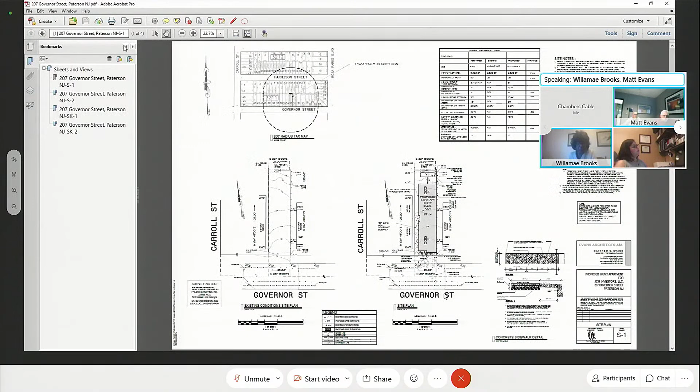Yeah, okay, so I could share my screen here. Give me a second. So we have... can you see that? The site plan is visible? Yes? Okay. All right, good.

So basically what we have is a 4-sheet submission, S1, S2, SK1, SK2, dated 2/22/21. What we're proposing, it's a vacant lot, and we're proposing new construction, which would be a 6-unit building, 1-bedroom each. That would be basically to the easterly side of the lot and have access along the westerly side.

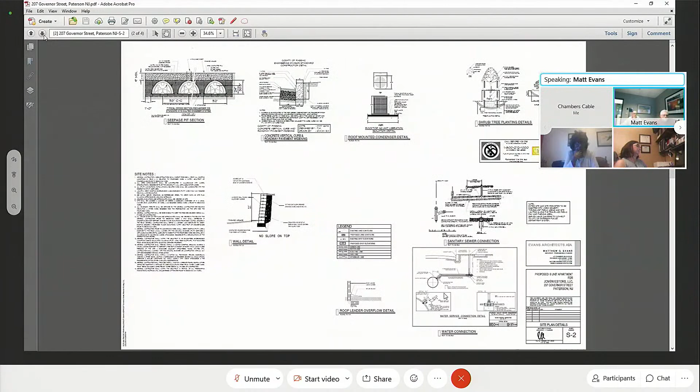It's 12 by 17. Then we have, for exterior access for the tenants, a refuse and recycling area, which is basically outside but has interior access, built onto the interior of the building. We have a sprinkler utility room, a package area in the lobby, and then in the rear we have unit 101, that's 603 square feet, also another large unit with a large bedroom in the back.

600 being the minimum size? Yes. Okay. And then we go to the second floor—we have a main entry and stair which accesses all 3 floors. There's no basement, so everything's above grade. And the rear unit is similar, a little bigger than the first floor unit because we don't have the sprinkler utility refuse area.

So we go back to about 761 square feet. The front unit is 737 square feet, similar to the upper floor. So the second and third floors would be the same, and they're all pretty much similar in the same context of what we have.

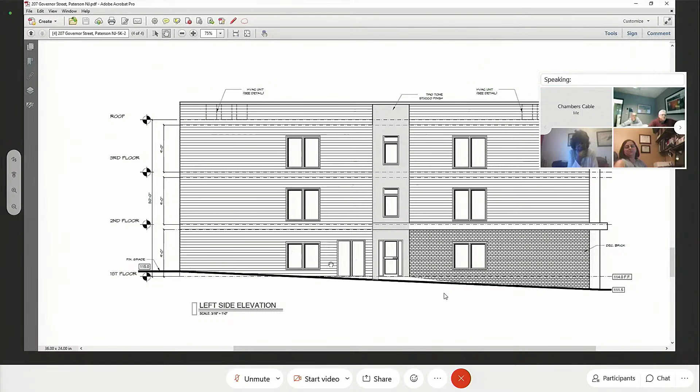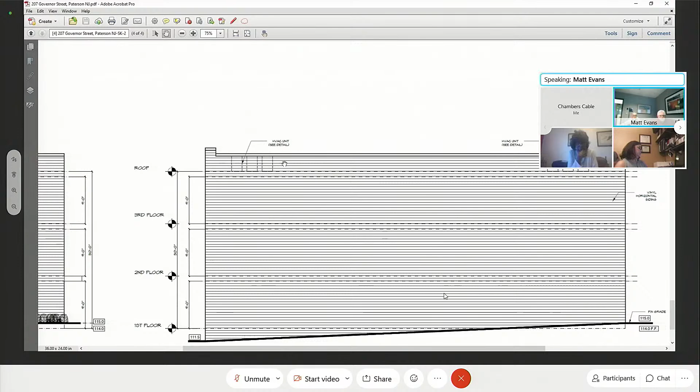Large windows are predominantly on the second and third floor because of the street level apartment—we wanted to give a little more privacy. So the rear elevation shows the vinyl siding, and the right side would also be vinyl siding. Then we show the HVAC units, which should be tucked behind the parapet on the exterior.

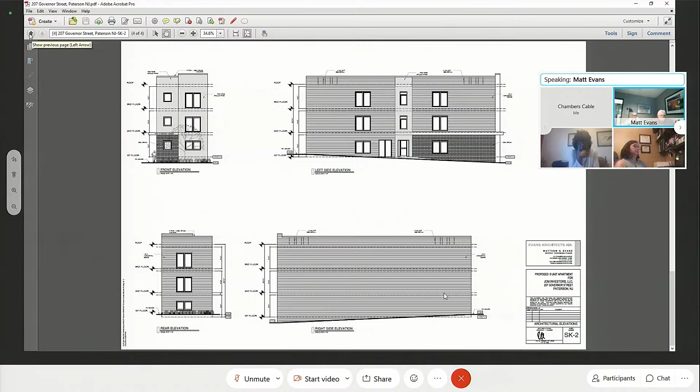So that would be the architecturals, what we're proposing—similar to one we proposed that was approved by the board a week or two ago. And all these units are self-contained with laundry facilities? Yes. Okay, and we do have a substantial amount of open space because of the size of the lot? Yeah, so if we look at the site plan, we can look at the back.

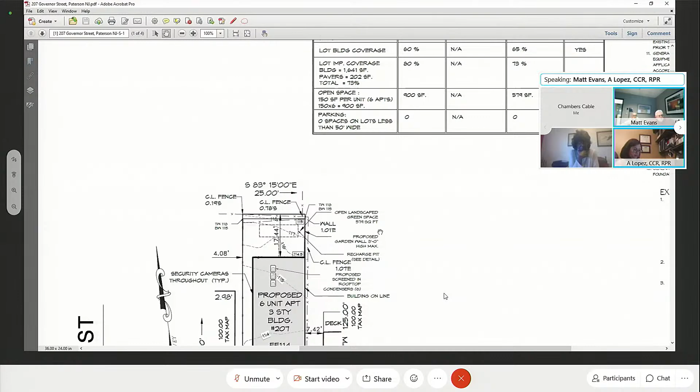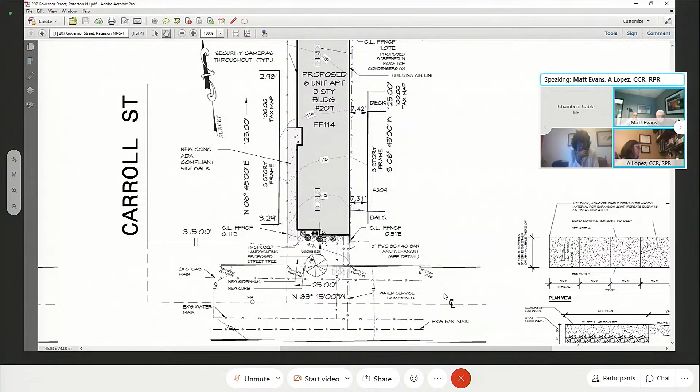We have 17 feet by 25 feet in the back, so we have roughly 600 square feet of recreational, outdoor, passive and active space. And then we have the ADA compliant walkway. We're also proposing landscaping in the front, a 3-foot setback on the building. We've used that to buffer the sidewalk with landscaping and a proposed street tree, which would be a decorative cherry tree that would blossom in the spring and wouldn't get too big, so it'd be more decorative.

Okay, and our building stories is only 3 stories, is that right? Yeah, within the requirements. And also our building height is well within the requirements? Yeah. Okay.

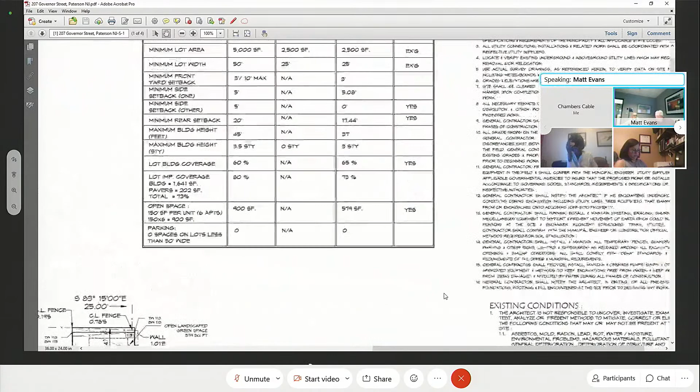I think I'll conclude Mr. Evans' testimony, subject to any questions the board may have.

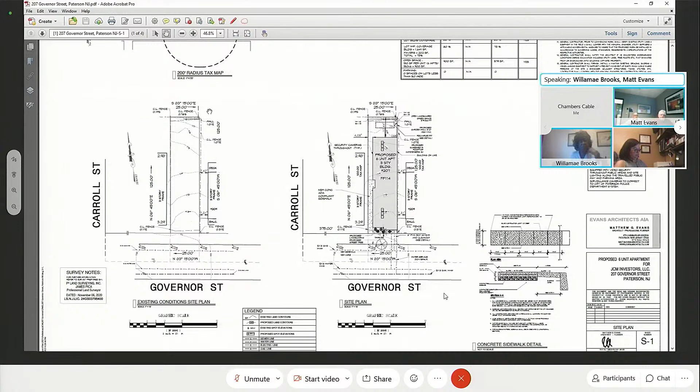So Mr. Williams will be testifying for planning. Okay, so you have Mr. Reed and Mr. Williams, correct? Well, do you want to take Mr. Reed before I go to the public? No, we can go to the person, or you open it to the public. Okay, Mr. Reed is up.

Do you swear or affirm the testimony you're about to give us is the truth, the whole truth, and nothing but the truth? Yes, I do. State your full name for the record. Andy Reid, R-E-I-D, Director of Development for JCM Investors.

Thank you, Mr. Reed. You heard Mr. Evans' testimony this evening? Yes. And you are in full agreement with that testimony? Yes. And you also had the benefit of hearing Mr. Deutsch's report and his staff report? Yes. Again, this is a design that is similar to others that we have proposed to the board successfully.

Could you tell us your thoughts about the 1-bedroom units and how this will function? Yeah, well, we have a demand for 1-bedrooms. Obviously there's no parking there, and Mr. Williams will talk about that. But in our experience, a lot of times our 1-bedrooms, most of the tenants are just starting out or they're elderly, so they use either public transportation or car share services and stuff like that.

Okay, well, I know we've been through this on other applications, but describe your security and lighting standards that you apply to these buildings quickly again. The security, the cameras, the maintenance - all of our properties, and we have substantial properties in that area, so they feed off each other. We have a lot of security in that area. We keep almost that whole entire block all cleaned up, and actually the block prior to that and that block. We keep the street all clean on a daily basis.

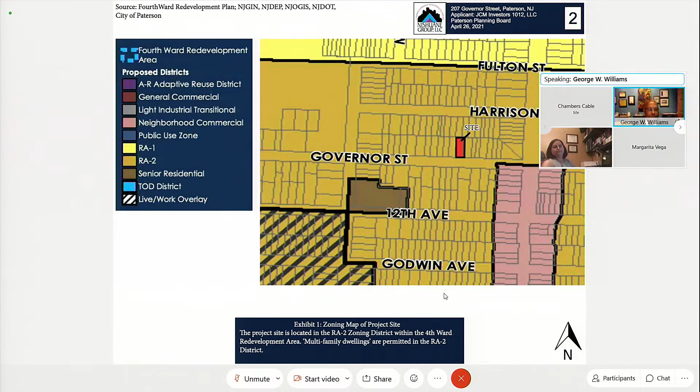The first slide, we always include this just to, for the record, acknowledge that we are certainly in the RA2 district. In this case, our site is indicated with the red shading and black bold boundary. This is slide number 2, showing we are in the RA2 zoning district of the 4th Ward. Slide number 3, another perspective, also an aerial photograph looking at the site, again shaded in red with a bold black border. This is to give you a sense of its context.

Located on Governor Street at 207, as was mentioned earlier, and not far from Rosa Parks Boulevard. What's also instructive from the aerial view is you get a sense, and this goes to Commissioner Ahmed's discussion about lot sizes, of what the land development pattern is in this section of the 4th Ward redevelopment area. You can see that by looking at the rooftops, which are darker shades, in some cases lighter shades, in each of the lot rectangles you see on this site.

I would submit to the board, without doing any calculations, there are a number of undersized lots in this section of the 4th Ward redevelopment area. In fact, your redevelopment plan mentions that there are opportunities to develop these undersized lots so that they do not remain vacant or abandoned.

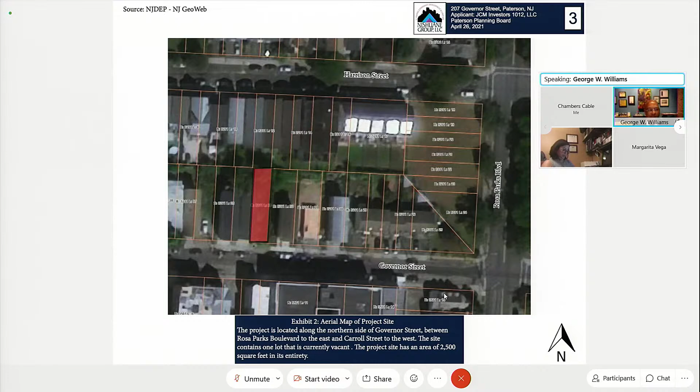I'm going to note that our slide also refers to a 2,500 square foot lot area. I will concede to Mr. Deutsch's calculation on the fly based on the survey, and we can certainly amend our exhibit and submit a clean copy. Slide number 4 is a frontal view of the property.

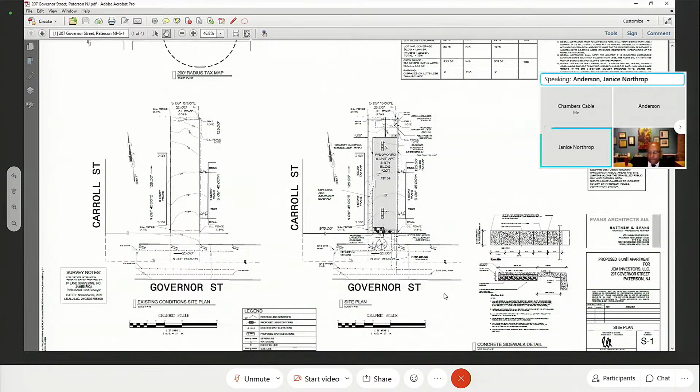Okay, please show commission. Excuse me, I'd like to say something please. If you're going to speak, let the other one finish, so Melinda, the court reporter, can document everything that is said. Thank you. Fine. Okay, I would like Mr. Evans to show the first floor to Commissioner Ahmed, where this change is going to take place. Mr. Evans, if you would delineate on your first floor plan how the unit will be completely eliminated and provide the amenity community room.

Okay, as you see on the first floor plan, we have the refuse recycle and the sprinkler utility, and there's a door going back to that. Basically, we would use that whole space as amenity space and remove the apartment, and then the rest of the apartments would remain as is, based on that core development, central corridor and stair, which would remain. So everything in the rear would be part of the amenity space.

And that would essentially, Mr. Williams can confirm it, and I think you already did, take us over the top in terms of the open space requirement. Yeah, that would definitely do that, and we would have additional storage, amenity space, and could even put a fitness center in there also. So we have a lot of space to work with. Thank you. Commissioner Ahmed?

I think what they're saying is that even if they remove the one apartment, it's still too small to put any parking, because these are only 1-bedroom units. I might be wrong in that, but I think that's it.

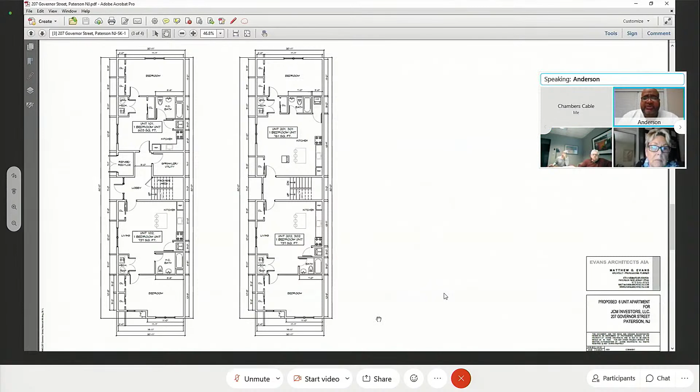This right here would benefit all 5 of the tenants, and like Mr. Evans said, if they want, we'll put a fitness center, a little gym in there, so they can all benefit from it. Okay, all right, thank you.

Commissioner Ahmed, any other questions? No, ma'am. Okay, all right, any other commissioners have any questions? Okay, hearing none.

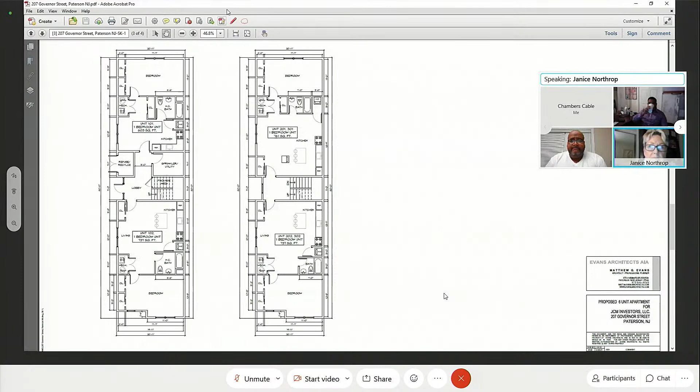Thank you again, Madam Chair. I want to make this very brief. I think we've really worked very hard on this application from both sides of the aisle, in terms of the applicant's presentation and the commissioners. I want to thank everyone for the work they put into this application. I think we've arrived at a very positive result in terms of the very limited bulk variances required. I think this is a very positive application for a specific demographic need in this area, and I urge the board to consider a motion for approval. Thank you.

I'm going to open it up now, commissioners. Would any commissioner like to make a motion on this application? Anyone? Yes, Commissioner Dean? Go ahead, please.

On the application of JCM Investors 1012 LLC, 449 East 18th Street, Paterson, New Jersey, 07524. Commissioner, can I interrupt you one second, please? My apologies, I just wanted to clarify something very quickly before you make your motion. Whoever can answer this question.

By removing that rear unit, what is the actual square footage of the proposed recreation room or open space, whatever it is that you want to call it? Mr. Evans testified approximately 600 square feet, is that correct? Yeah, I didn't hear that. Was it 600? Yes. Okay, thank you. Go ahead, Commissioner. I apologize. Sure, no problem.

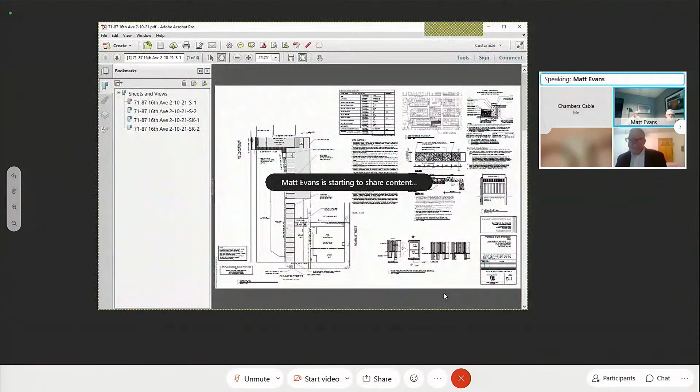Okay, I'm going to post our plan. Can you see that?

To illustrate what we have, it's an irregularly shaped lot which connects 16th Avenue to Summer Street, and it's existing 100% impervious area. What we're doing is we're proposing a new 4-story building to the westerly side of the property. It's basically tucked between a previous approval we had for 12 units on Pearl and Summer, and the car wash adjacent to our property, which is along 16th Avenue and ends up on Summer Street.

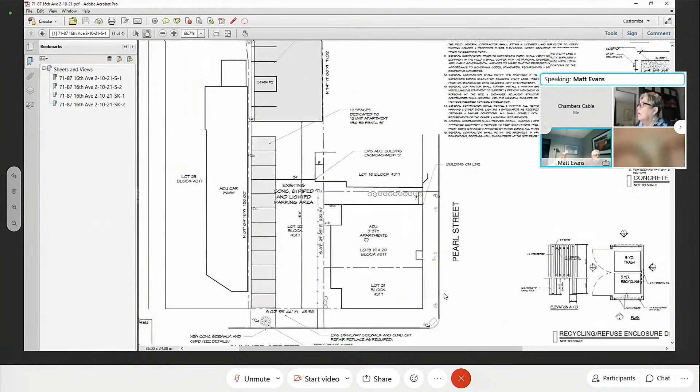It's 100% impervious coverage, and we show the parking spaces from the previous approval. There's 12 parking spaces dedicated to the previous approval for Pearl and Summer for the 12 units that was conditioned. The rest of the parking, 12 spaces, we're dedicating to our proposed building, all underneath the garage area. So we have 12, and then we have the 12 consistent with the previous approval.

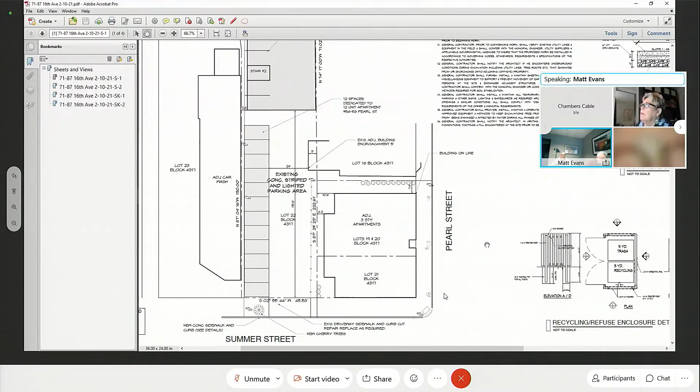The building is 4 stories, and it faces 16th Avenue in front, sandwiched between the residential to the west and the existing car wash to the east. I'll illustrate a little more and go to the floor plans.

On the first floor plan, the ground floor, we show the 16th Avenue entry. We have landscaping to the front, and a paver patio and path to the rear of the building. Inside we have a nice open lounge area and entry lobby, which is 709 square feet. We have mailboxes shown, a package room, and also the first egress stair, which is part of the lobby area, bringing us up to the upper floors.

We have the elevator, sprinkler room, and bike storage. Adjacent to that, we show the refuse and recycling, which is exterior, accessed on the exterior walkway and path, another way to access the property for refuse and recycling.

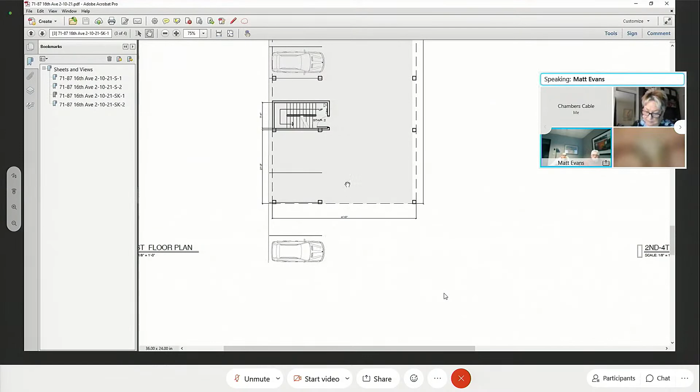We show the line in the building above, 11 parking spaces in the garage. We show the handicap space and the parking spaces, the garage, and then there are 2 spaces exterior, which are counted towards our application. That's all underneath the residential.

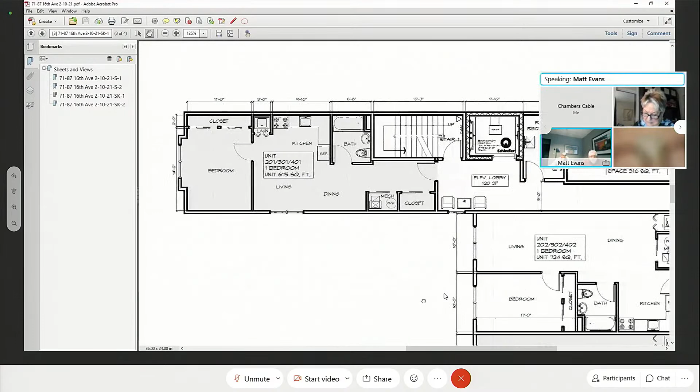Going to the second floor, the second through fourth floor would be the same type of layout. Unit 201, consistent with 301 and 401, is a 1-bedroom unit, 675 square feet. We have a large bedroom in the front, living, dining, kitchen, a stackable laundry as part of the unit, handicap bathroom, full bath, and mechanical, which are all separate utilities for all the units, plus a front hall closet.

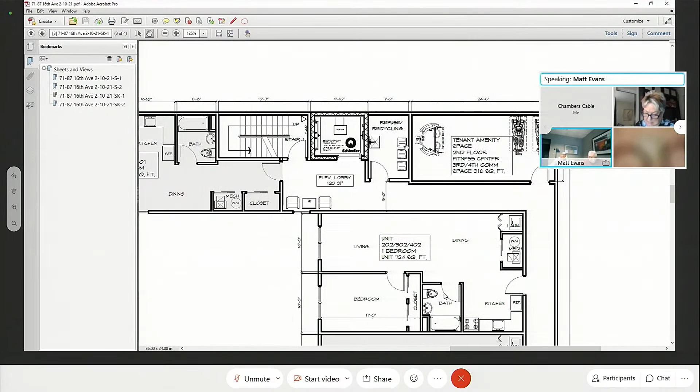That was accessed off the entry. The elevator lobby has 120 square feet with seating and a window, and access to refuse and recycling on each floor, part of the service area. The tenant amenity space on the second floor is a fitness center, and the third and fourth floors would be community space, 316 square feet per floor.

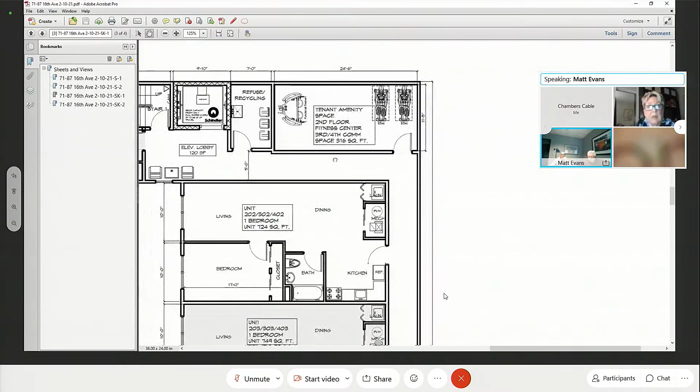Unit 202 is a 1-bedroom apartment, 724 square feet, which meets the minimum requirement—124 square feet over the minimum. We have a large living dining area, kitchen, open living space, a large bedroom, and a handicap bathroom. As mentioned, all units have separate laundry facilities.

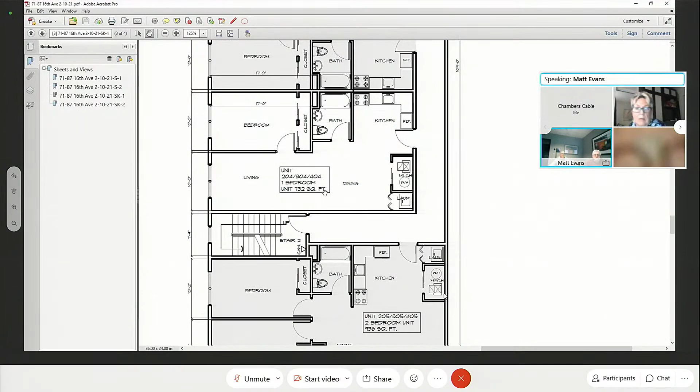Unit 203 is similar to 202, also a 1-bedroom unit. Unit 204 is a mirror of 203, so that would be the same. 202 is 724 square feet, 203 is 749 square feet, and 204 is 732 square feet. Then we come back down the hallway, and there's the fire stair, the second means of egress off to the rear.

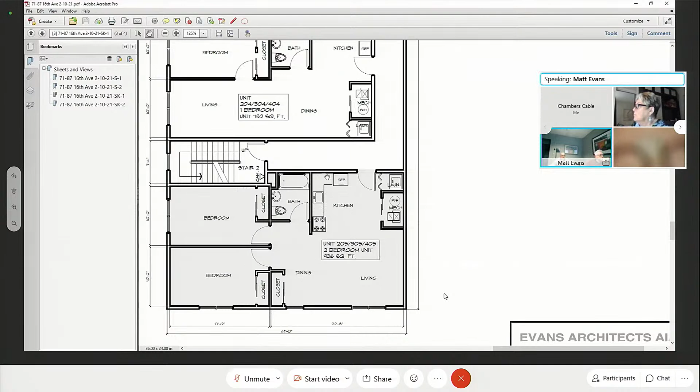Then we have unit 205, which has a nice 2-bedroom unit at 936 square feet. We have a big open kitchen, dining, living area with large windows along the living space, and windows along the bedrooms for the bedroom space. That would be consistent with the floor plan.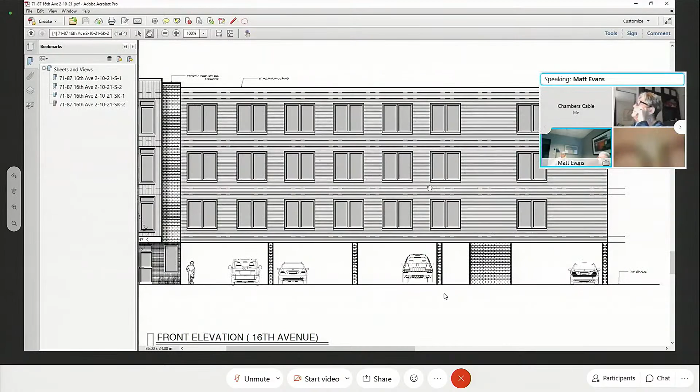We have street trees, which are consistent with the redevelopment plan. And then we have a mix of materials. We have large windows for all the units.

We have brick veneer, vertical siding, and a mix of materials, also horizontal siding on the rear section. Looking at it, you can see the cars under the garage area, and this rear section is not at 16th Avenue. It's pushed back and behind the setback from 16th Ave for the garage in the rear.

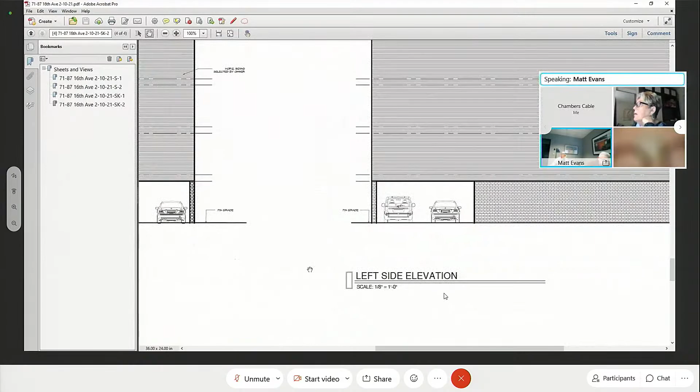So the left side is a plain elevation that's on the rear property line. And then we have the same with the rear elevation along the back. This is the left side elevation, along the side, which is adjacent to the other residential units.

And then you can see where the car wash would be if you're looking at it from Summer Street, but looking at the building cut away, we have the mix of materials and large windows for the apartments from the second, third, and fourth floor.

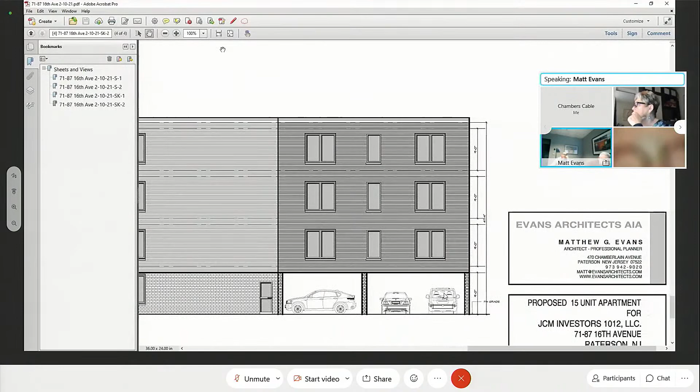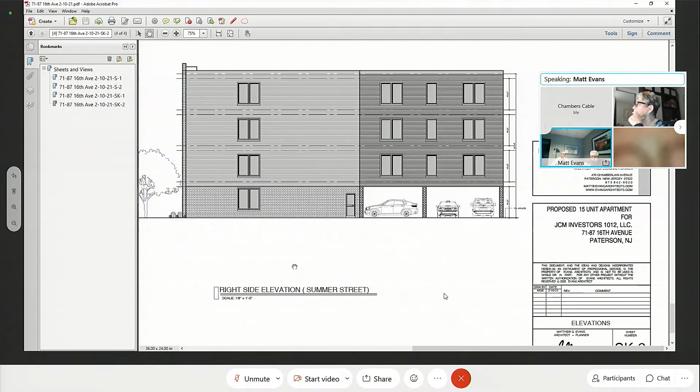Zooming in here, we have nice high ceilings in all the apartments. We're proposing 9-foot ceilings for the garage and 9-foot ceilings for the second, third, and fourth floor. That gives a lot of volume to those units and a much more pleasant atmosphere within the living space.

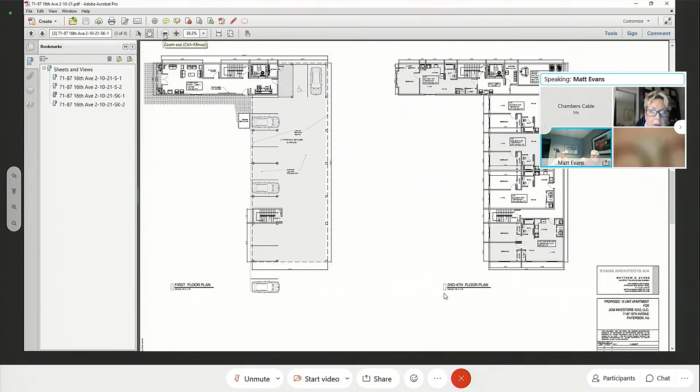That would be the architectural plans spelled out in what we submitted. Just to clarify again, Mr. Evans and Mr. Williams can amplify upon this, please designate the parking that's on site and the parking referencing the Pearl Street project, and how it's utilized.

Looking at the first floor plan, on the top right we have a handicap spot and a regular spot, and the handicap access. We have 2 parking spaces there.

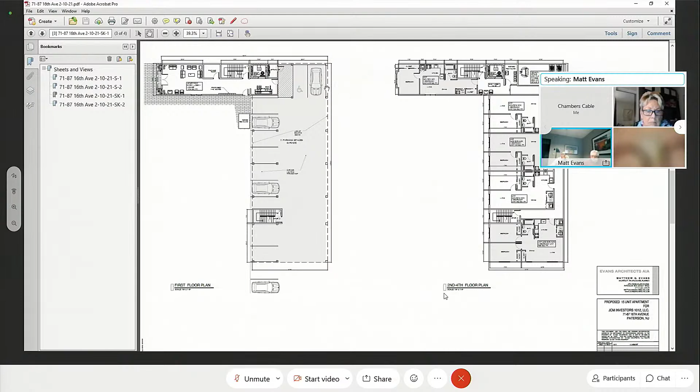Then as you come down under the garage area, we have 1, 2, 3, 4, 5, 6, 7, 8, 9 underneath the garage. So that's 9 and 2 is 11, and then we have 2 exterior spaces adjacent to that, which I'll go back to the site plan to show.

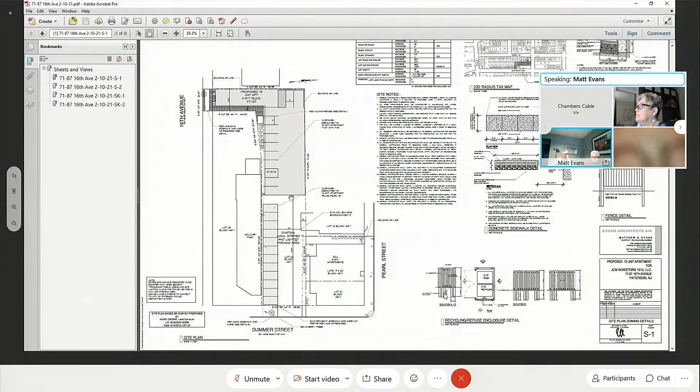You'll see how we have these spaces outside and under the garage dedicated for our development. Then we show the shaded area, which was part of the resolution for the Pearl 12 units. Those would remain along the drive aisle for the existing approval, so that would not count as part of what we're proposing in our parking layout.

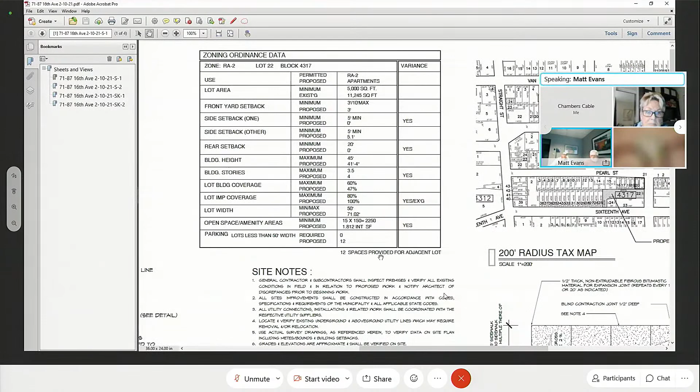As part of our requirement, we have 12 spaces provided for us, and then 12 for the adjacent property. I think you indicated 11 plus 2, am I right? Or let me see, we've got 1, 2, 3, 4, 5, 6, 7, 8, 9, 10, 11.

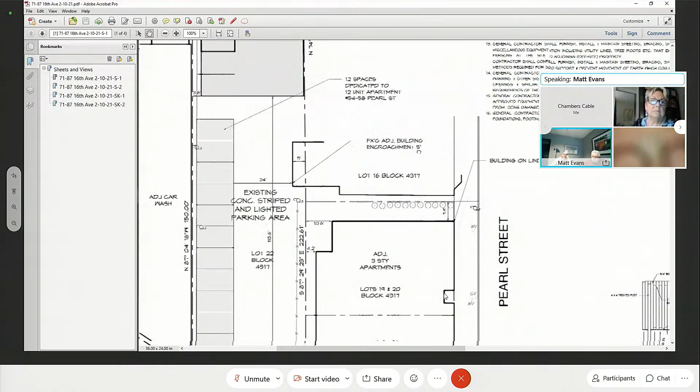No, 12, I'm sorry, one outside, okay. Yeah, that other one was part of the other one. So we have 12 and 12, 24 spaces, 50% would be dedicated to the previous resolution. Mr. Williams will cover the variance requirements of the parking.

So would that conclude your testimony at this time? Yes. Okay, that's all I have, Madam Chair, at this time. Okay, for the sake of time, please call Mr. Reed.

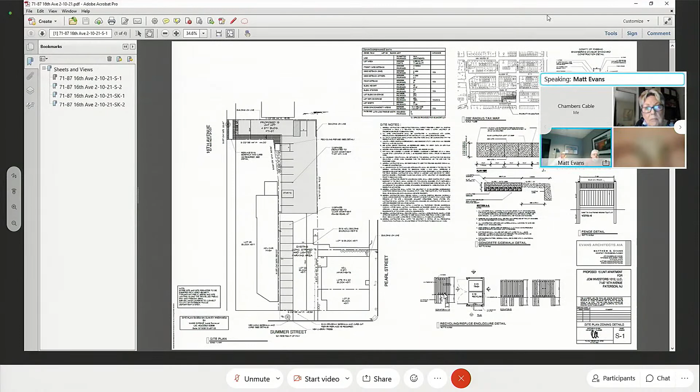Please raise your right hand. Do you swear or affirm the testimony you're about to give is the truth, the whole truth, and nothing but the truth? Yes. Please state your full name for the record. Andy Reid, R-E-I-D, Director of Development for JCM Investors.

Thank you very much, Mr. Reed. Obviously you've heard Mr. Deutsch's report and Mr. Evans' testimony into the record this evening, is that correct? Yes. Okay, and this is a project on a very large parcel of over 11,000 square feet. You're in full agreement with the designation in terms of number of units and so forth?

Yes. Okay, and the parking proposal before the board would provide 12 of the 24 spaces. Mr. Williams will discuss the variances as well, in addition to parking. But this site will be managed and monitored in a similar fashion to your other housing developments? Yes. Okay, that's all I have, Mr. Reed, at this time.

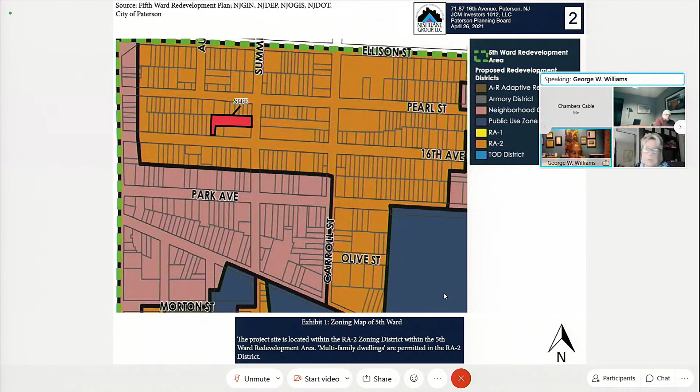Slide number two, again, always begin with this to confirm for the record that the site is indeed located in the RA2 district of your 5th Ward redevelopment plan. This image is taken directly from the 5th Ward redevelopment plan itself, and my staff and I have provided some overlays. The property is indicated in the pinkish color, and it's clearly identifiable because of its L shape, and indicated with a label identifying it as a site.

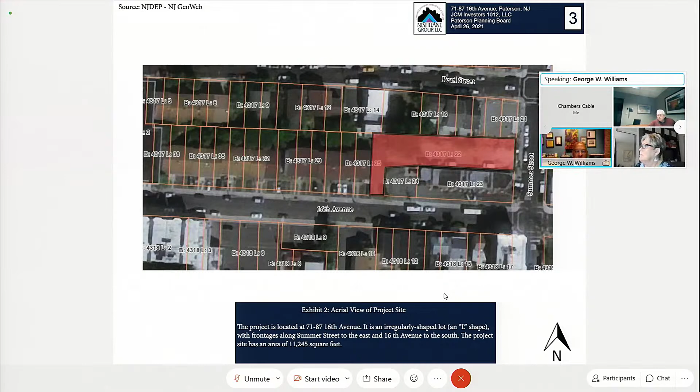Slide number 3, again, an aerial perspective, just showing this site in the context of the surrounding lots. Unlike the prior application, this lot is irregularly shaped and considerably larger than the other lots in this area. It also has the unique characteristic of wrapping around another development on lot number 23 and 24. So Matt Evans addressed those development challenges, and you'll see images of that challenge in a moment.